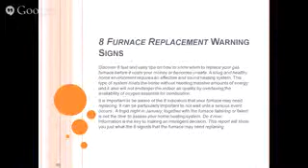A snug and healthy home environment requires an effective and sound heating system. This type of system heats the home without needing massive amounts of energy and also will not endanger the indoor air quality by overtaxing the availability of oxygen essential for combustion.

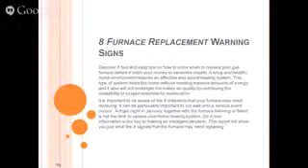It is important to be aware of the 8 indicators that your furnace may need replacing, by emergency furnace replacement specialists. It can be particularly important to not wait until a serious event occurs. A frigid night in January, together with a furnace faltering or failed, is not the time to assess your home heating system. Do it now.

Information is key to making an intelligent decision, and this report will show you just what the 8 signals are that your furnace may be in need of replacing.

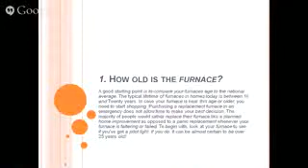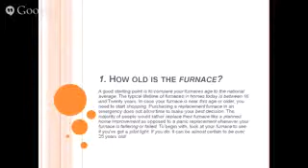Number 1, how old is the furnace? A good starting point is to compare your furnace age to the national average. The typical lifetime of furnaces in homes today is between 16 and 20 years. In case your furnace is near this age or older, you need to start shopping.

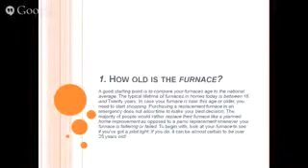Purchasing a replacement furnace in an emergency does not allow you time to make the best decision, and it kind of paints you back into a corner. Emergency furnace or heater repair or replacement in Salt Lake City can be expensive if you don't plan ahead. The majority of people would rather replace their furnace like a planned home improvement as opposed to a panic replacement whenever the furnace has failed.

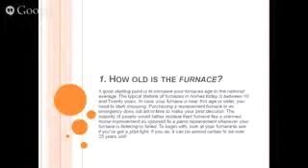To begin with, look at your furnace and check to see if you've got a pilot light. If you do, it can be almost certain to be over 25 years old.

Number 2, gas and electric bills are going up. Rising utility costs are not the only cause of high bills. Furnaces often lose their efficiency the older they get, particularly if they haven't been properly maintained.

Number 3, any furnace repairs within the last 2 years? Furnaces resemble cars. The older they get, you are able to replace one part just to need to replace another part the next year. This doesn't take very long to spend $500 just to keep your old furnace running.

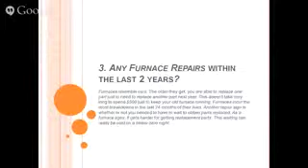Furnaces incur most breakdowns in the last 24 months of their lives. Another repair sign is whether or not you needed to wait for the parts to be replaced. As a furnace ages, it gets harder to find replacement parts.

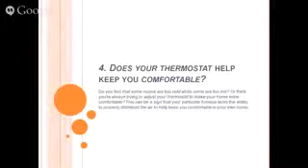Number 4, does your thermostat help keep you comfortable? Do you feel that some of the rooms are too cold while some are too hot? Or think that you're always trying to adjust your thermostat to make your home more comfortable? This can be a sure sign that your particular furnace lacks the ability to properly distribute the air to help keep you comfortable in your home.

Number 5, is your burner flame yellow rather than blue? A yellow or flickering flame can be a sign that poisonous carbon monoxide might be produced by your furnace.

Other possible signs of carbon monoxide are streaks of soot around the furnace, absence of an upward draft inside your chimney, excess moisture around your windows and walls, excessive rusting on the flue pipes, other pipe connections or appliance jackets, a small amount of water leaking from the bottom of the chimney vent or flue pipe, and rust about the portion of the vent pipe visible externally. These all might be signs indicating that you have an impending emergency furnace replacement or repair coming up.

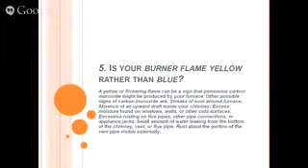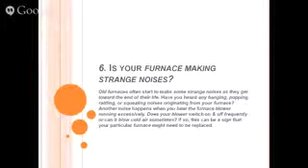Number 6, is your furnace making strange noises? Old furnaces often start to make strange noises as they get towards the end of their life. Have you heard banging, popping, rattling, squealing noises originating from your furnace?

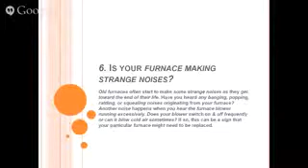Another noise happens when you hear the furnace blower running excessively. Does your blower switch on and off frequently? And can it blow cold air sometimes? If so, this can be a definite sign that your particular furnace might need to be replaced.

How have you and your family been feeling? Furnaces, as they age, can risk developing cracks inside the heat exchanger inside the furnace. Carbon monoxide, if there is any, could leak into the home undetected. Signs of this may be frequent headaches, a burning feeling in your nose or eyes, nausea, disorientation, and flu-like symptoms.

In the event that you experience any of these, air out your house, open a window to the furnace room, and immediately call a gas service technician. Cracks within the heat exchanger can happen undetected, which is the reason nobody advises waiting until after they occur.

Is your house dry or dusty? Old furnaces that may be in need of emergency repair or replacement often don't have the capacity to moisturize and clean the air in your home. Your house air may feel stuffy or stale.

Does anyone within your family have problems with allergies to airborne dust, mold, pollen, viruses, or dander? Or does anyone suffer from dry nose, dry throat, or dried out skin? Other signs may be frequent dust accumulation, static shocks, drooping plants, furniture cracking, and musical instruments that do not remain in tune. These signs all report that your old furnace is just not able to offer you the comfort that yourself or your family might want.